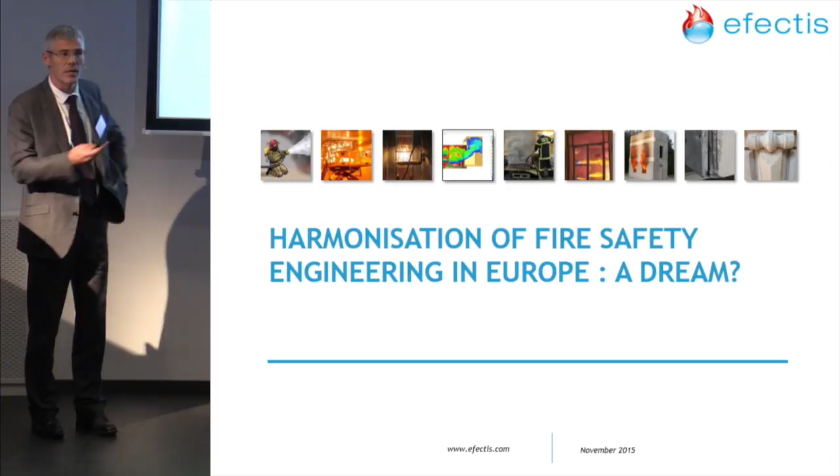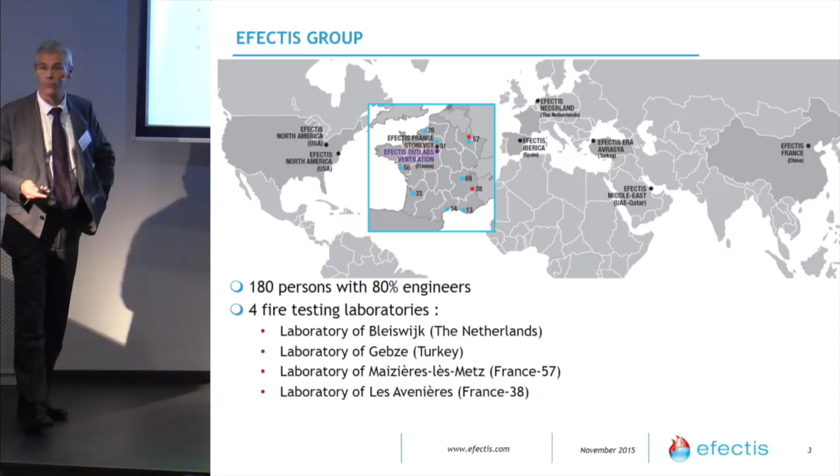So just a few words to introduce myself and Efectis. I'm leading the group Efectis, where there are 4 labs - 2 in France, 1 in Turkey, and 1 in the Netherlands. So you imagine that effectively standardization, testing, everything is fully linked. And I will speak about that, on how to link all these things.

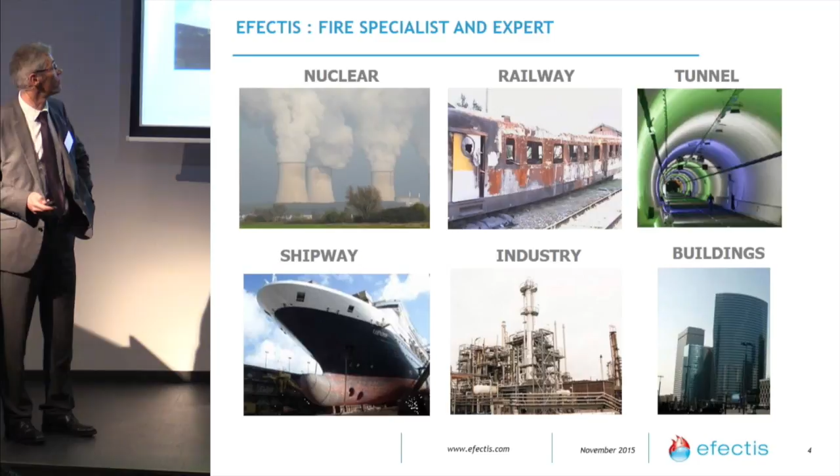We are involved for all types of explanation of constructions - meaning transportation, industry, nuclear plants, energy sector in general. So we can use all the research knowledge from all these aspects, because fire safety is really completely transversal and applied to all types of construction, industry, or transportation.

Mainly, as it was for many years, regulations were mainly based on prescriptive rules, and they were based mainly on the knowledge we had on fire dynamics occurring more than 20 years ago, 30, 40 years ago, or sometimes, as presented just before, more than that - 100 years ago.

20 years ago, it was relatively easy to change regulations. Now it's more and more difficult to adapt the regulation to the risk of the building. And it was shown this morning from a US point of view about the evolution of fire dynamics in buildings.

So the increased capability of the fire kinetics will need changes to adapt the regulation, but it's more and more difficult for all the ministries in charge of the prescriptive rules to adapt it regularly, and mainly according to the different investigations we can have. So these prescriptive rules are...

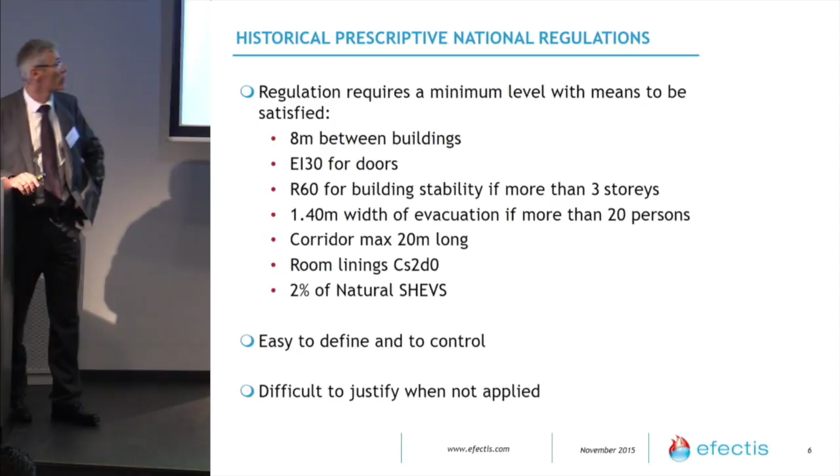So in fact, Europe has been included in fire safety since the directive of the construction product, introduced at the end of the 80s, with new essential requirements that were defined, and then all the laboratories worked together in order to have a harmonization of the tests at the European level.

Then we were able to define product performance in standardization conditions, leading, I would say, more recently, because the first products required for CE marking were in 2003 - it was mainly for fans, for fire reasons, for example. So it's a very recent situation, as the last products to be dedicated to CE marking will be doors - we don't know if in a few months or perhaps a few years.

But nevertheless, this whole European standardization that has been made has been enforced by the CPR, so in 2013, the Construction Product Regulations. So this was the first step of harmonization in Europe, but we will not, of course, stop at this stage as CPR. And the question is how to harmonize the safety levels in Europe.

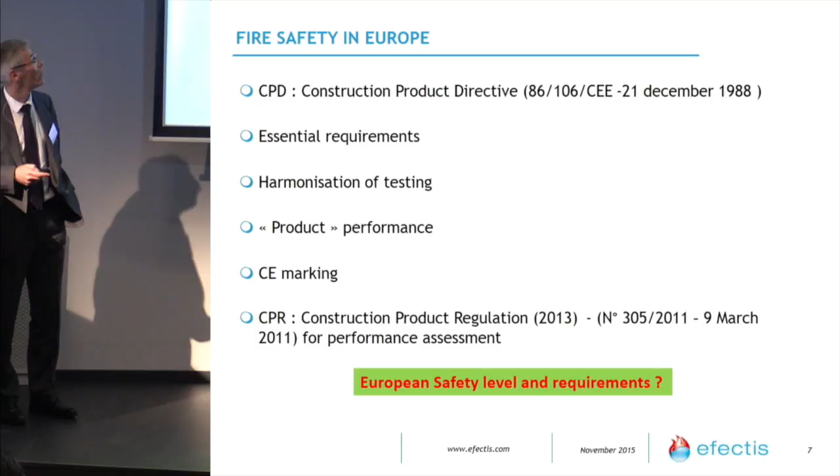So there was mainly one way to harmonize the safety level in Europe: to use fire safety engineering in order to satisfy the main essential requirements that are given by the CPR in Europe.

So the main question is that the notion of safety level is very complex to define, and deriving a safety level from the prescriptive regulation is today impossible. So making such comparisons between prescriptive codes is very difficult, and I would say impossible, because they are often based on different strategies about fire safety.

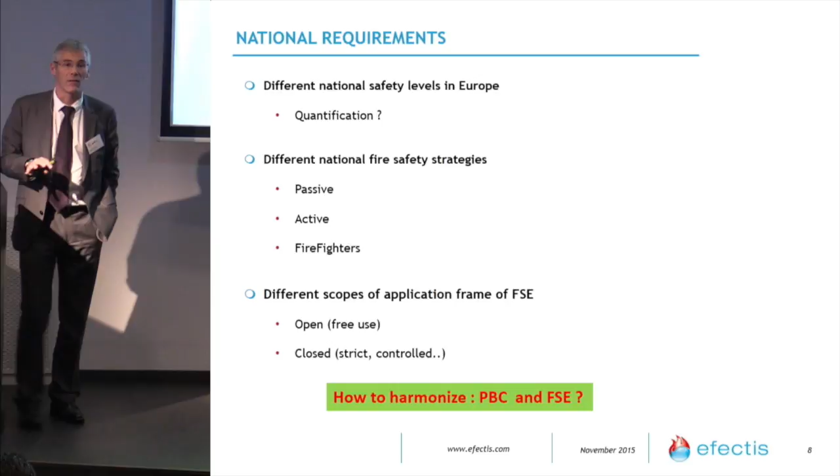Some are more on passive, some are more on active. Mobile firefighting conditions are also more included in some strategies. And all these prescriptive codes are using combinations of these three strategies for defining their own safety levels.

So the main way to harmonize the safety level in Europe is to use fire safety engineering. But today, in the same way, fire safety engineering from a national point of view is open differently. For some countries, it's more free use, and for other countries, it could be controlled or often fully refused to be applied on different constructions. So, how to harmonize the FSE and how to define a new performance-based code from a European point of view, at European level.

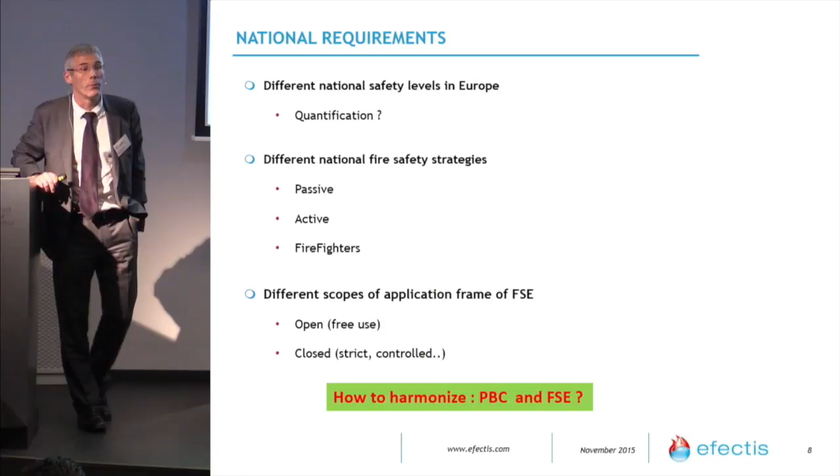But before going to harmonization, just some information and considerations about fire safety engineering. First, if we take the ISO definition from TC 92 SC4, that is the fire safety engineering standardization from an international point of view, and the last meeting was 2 weeks ago at NIST in Washington.

The main consideration is that FSE is the use of tools with scientific appreciation. Scientific means that you need to use the state of the art, the knowledge that we have today, not what has been standardized 20 years ago. And mainly fire safety engineering is to evaluate analytically. It means that you need to quantify, and it's not only expert judgment. We absolutely need to quantify.

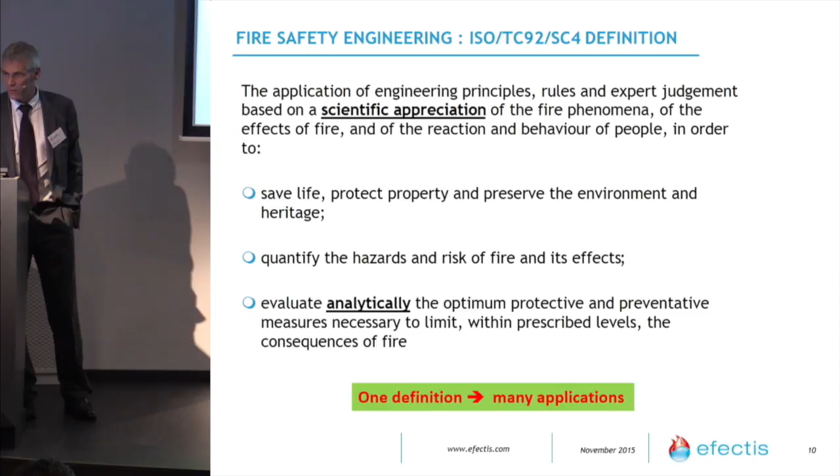Sometimes quantification is modeling, but sometimes, when you don't know, we need to combine that with possible tests in order to have such information that we can get from experimental assessment.

But if we go into the scope of application of fire safety engineering, for everybody it seems clear what fire safety engineering is, but in fact it's often not, because we have different views about what fire safety engineering is. If we just check the aim of the use, we have different types of use. For some, fire safety engineering is clearly design, because there is the word engineering in fire safety engineering. So it's fully related to design.

But for others, fire safety engineering is mainly verification of performance and behavior of the product, of the system, of the construction globally from the design. So it's two different ways to see fire safety engineering.

And then the main problem with using fire safety engineering in many countries is how to control it. What are the different steps of validation? What is the third party for fire safety engineering verification? What is the qualification of the engineers? What is the qualification of the different tools that are used today?

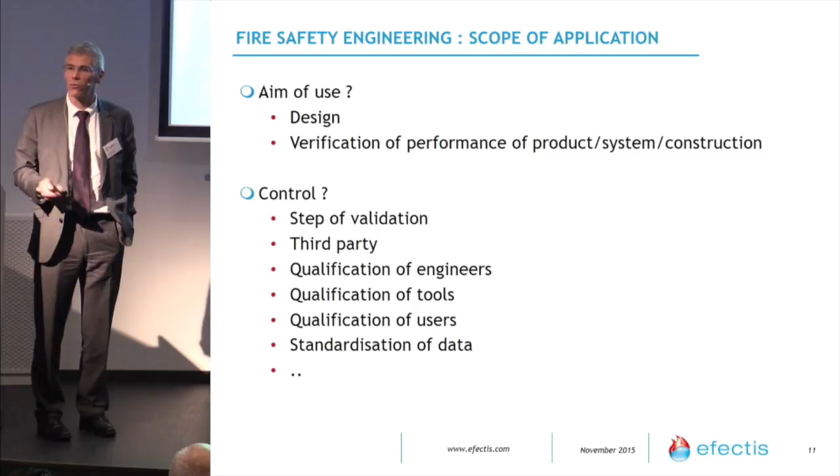The tools are sometimes very easy to validate. The main problem is how to validate the users that are using these tools, and how to standardize the different data. We have seen that for structural engineering, much standardization has been performed in the last years, but is it always adapted to current constructions? So there are many questions that can be asked before going to a harmonization in Europe for the use of fire safety engineering.

And when we look at the ISO standard 23932 for general principles in fire safety engineering, you have different steps to use fire safety engineering, but I'm just highlighting three of them. The first one is the design scenarios. Design scenarios, if your main application is deterministic, define the fire protection and the whole fire design of the building. So if we make any mistake in the fire scenarios, the results will be fully bad, and you will never reach the safety level of your construction.

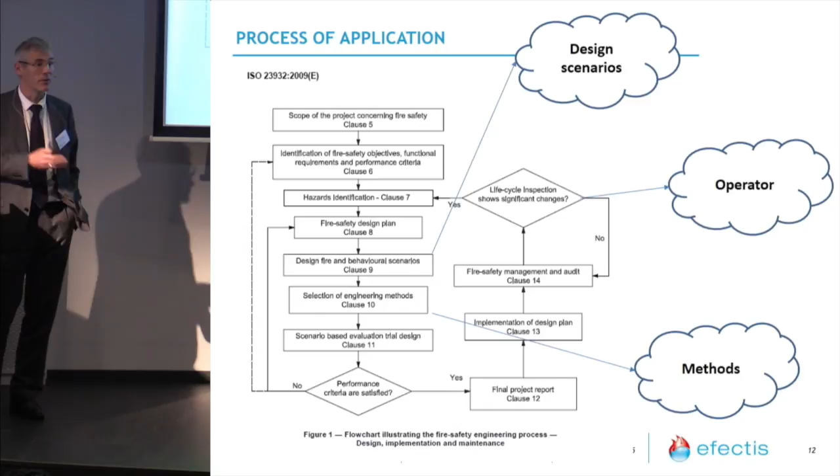And then you have all the methods, but mainly the first part, the scenarios, is more important. And then you have the operation of the building, the life of the building. Are the design scenarios, the design of the properties of the materials, always good compared to the life of the building, the evolution of the use of the building? That is always dealt with by the regulation in part, but with fire safety engineering it is more complex to use it in order to follow the evolution of the building itself.

Fire safety engineering is a huge tool where you need a lot of information. First of all, fire safety engineering is relevant to many different skills that have to work together and interact together. I'm just making a small list, but of course you have more than this. There is the ignition of the fire, so more the chemical part of the fire, but also statistics, but also how to take into account arson or not. We'd say that it is sometimes important to use it.

How will the fire propagate? How will the smoke propagate within the building? What is the behavior of the fire compartmentation under standardized conditions with the ISO rating? Is it enough or not enough compared to the real fire you can have within your building? The structural behavior, all the egress conditions, the fixed extinguishing systems, but also all the actions of the firefighters, their conditions of firefighting, and all the strategy may be included in it.

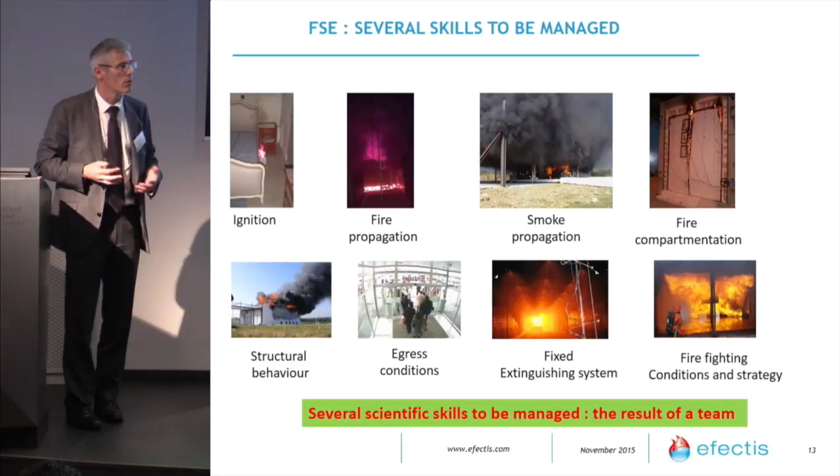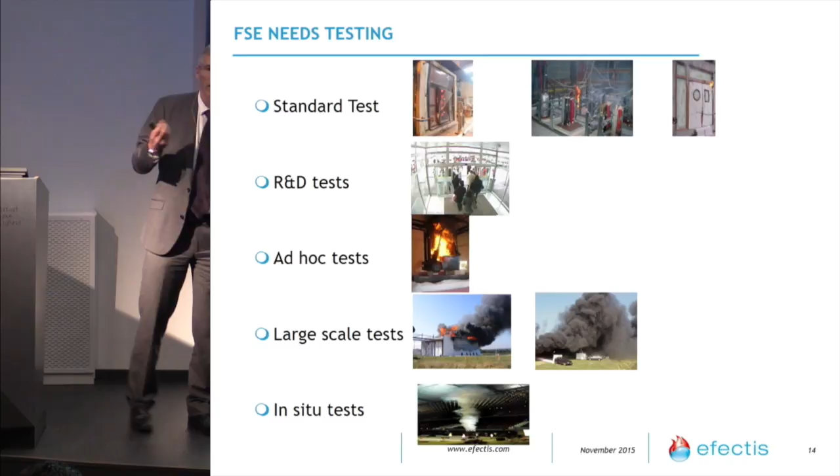So you have all these skills that have to be taken into account when you want to do fire safety engineering. That's why fire safety engineering must remain the result of a team with global knowledge about the behavior of a construction in case of fire. But FSE is often considered as modeling. But we know that we don't know everything. We don't know all the behavior of products, all the behavior of systems. And we know also that fire is very often difficult to model. So FSE needs tests. It's not the opposite of tests. FSE absolutely needs fire tests, fire behavior of products, of systems, or globally of the constructions.

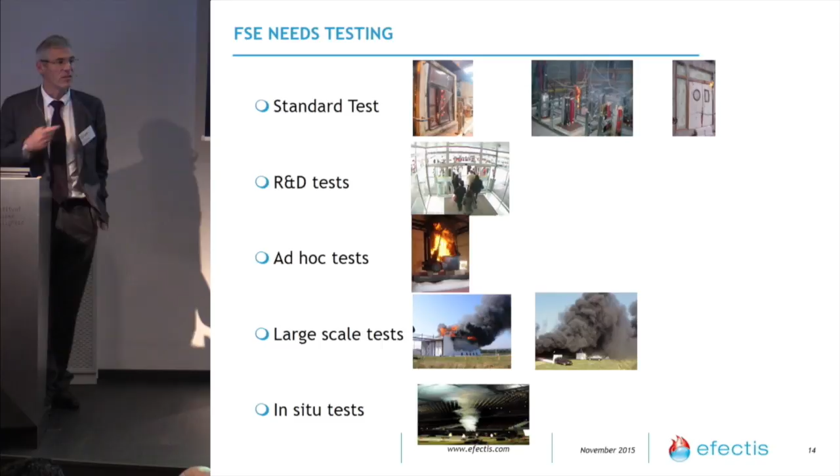They need the standard tests, of course, because there is a lot of information within the standard tests. There are R&D tests because we know we need to go further and more into detail on the behavior of the different products or any other item within the fire safety of buildings. We need ad hoc tests, mainly for the source of the fire, in order to quantify it. We need large-scale tests because trying just to extend the result of a small test is often very difficult. So we absolutely need large-scale tests in order to validate extrapolation effectively, but also to validate the models that are used. And we also need in-situ tests in order to verify within the building that all the systems installed have the right behavior with regard to the design that was fixed before.

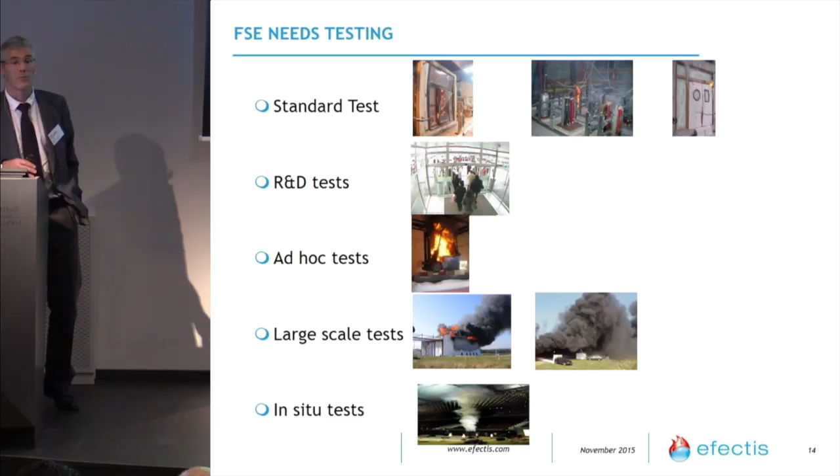FSE also needs to include firefighting conditions, the performance assessment of the intervention. We have different means. The means are evolving, but we need to be sure that the behavior of the means is relevant to the scenario, the constructions, or all the fire load you have within the building. The example of the quick flashover reached this morning, from a presentation from the US, shows that we also need to adapt our intervention means in order to have the right performance with the right scenarios.

But also all the behavior of the products inside the building needs to take into account all the impact we can have, if we need to take into account fire propagation for a big industrial hall, where the economic point of view has to be taken into account, and the environmental objectives also. So to reduce fire propagation, we need interaction between the firefighters' applications and also the fire resistance and fire compartmentation. All these aspects have to be taken into account within fire safety engineering because they are included in the fire safety level of the building. So if we want to make comparisons between the safety levels of buildings, we need to take that into account.

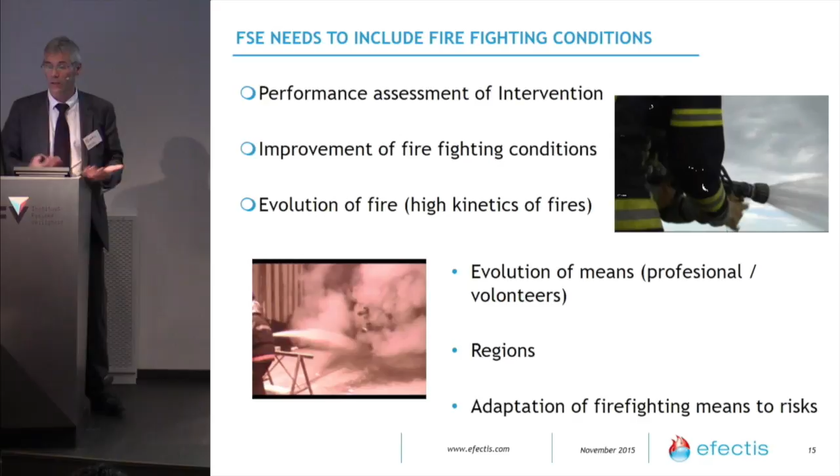We need also to include, from a European point of view, we know that SFPE Europe is working on this aspect of professional recognition in Europe. So we need to take into account the training, the validation of the tools, the training of the users, the years of experience of all the users, the results of a team, because it's always difficult to have recognition of one guy alone, because it is a very complex system. Fire safety is a complex system with many skills, as we said before. So it's very difficult to qualify one guy, and sometimes it's more the result of a team,

so we need to qualify that. Taking into account effectively the independence between the design and the performance assessment, as we consider fire safety engineering may be used on both sides, as a design but also as verification. So we need to take into account also this differentiation in the user. So what type of control do we need to develop for the situation in Europe?

FSE, if we consider that FSE is the state of the art, FSE absolutely needs research. It needs to go on, to learn more about the fire, to learn more about the fire behavior of systems. So additional research is always very important for the future in order to have better tools, in order to have better relationships between the different components of a product or of a construction.

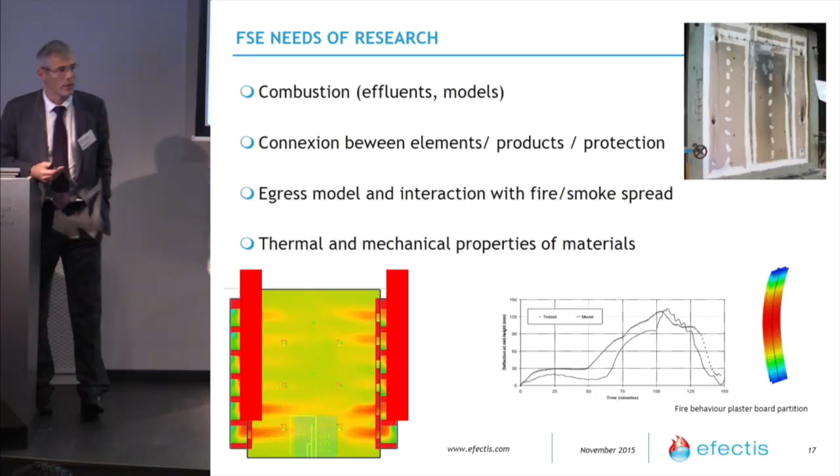Fire safety engineering also needs fire investigations, first to understand the limits. All this information, even if sometimes it is a disaster, we need to learn from this disaster and make fire investigations to understand effectively the limits of our models, the limits of our fire scenarios, because often the fire scenarios are only based on the past, very little on the future.

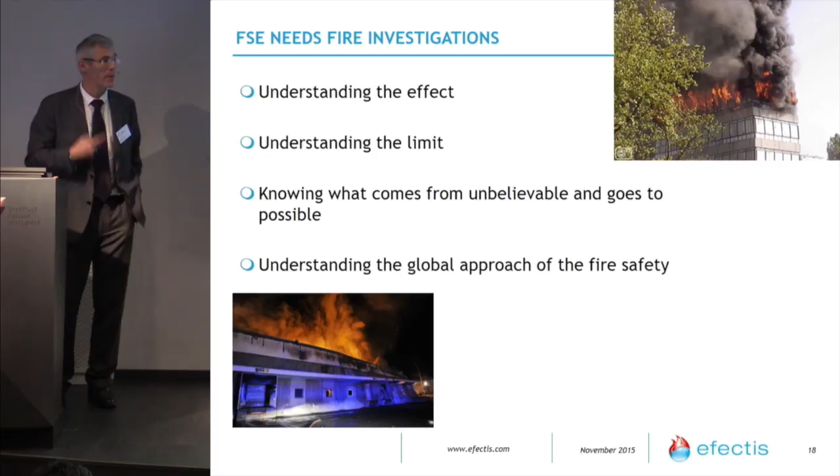So we need to take into account all this fire investigation on real fires, and to understand what went from unbelievable scenarios to possible scenarios. This remains very important, and all this investigation may bring us information in order to define better fire scenarios for the future.

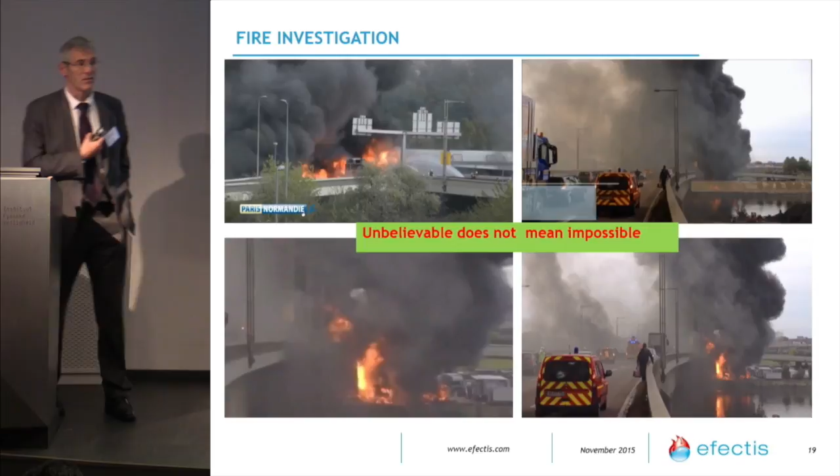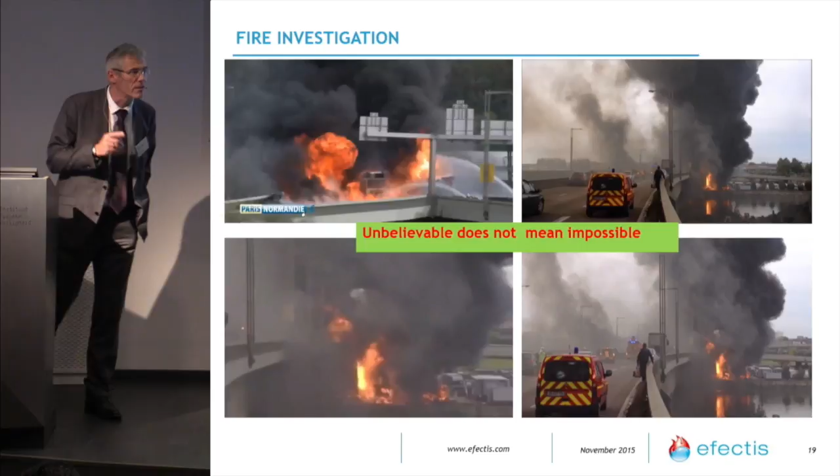And of course, if we are speaking about deterministic scenarios, as I said, there were many scenarios that were completely unbelievable, but now we know that they are possible. Nevertheless, impossible scenarios have to remain impossible scenarios. If we try to design buildings according to impossible scenarios, you will never make any design.

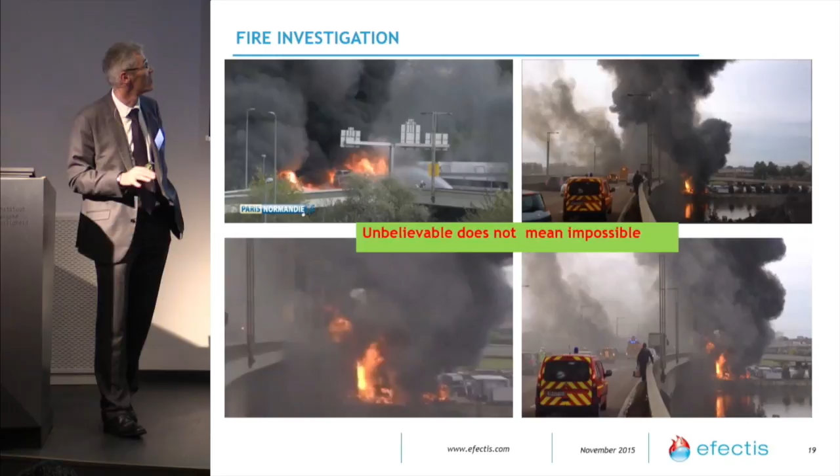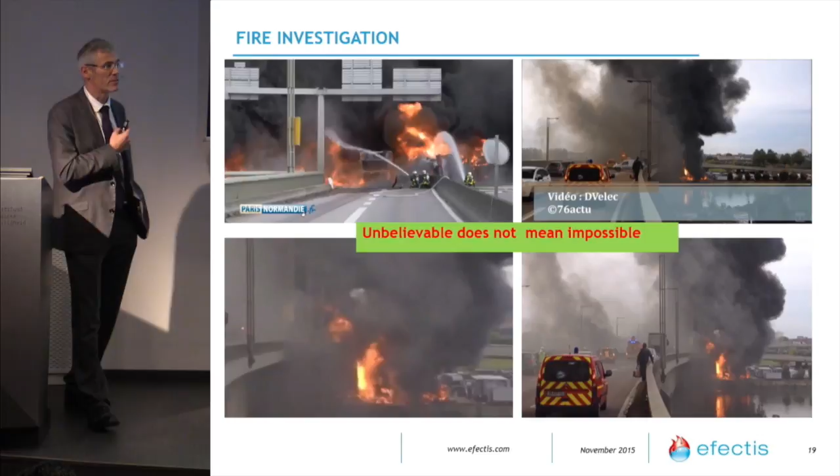But I'm just taking this example of the big tank fire occurring on a bridge at the entrance of the city of Rouen, where there was an accident above the bridge between the tanker and another truck, and then there was leakage of the fuel under the bridge where there were some caravans, so you had additional big fires under the bridge. So considering such a big fire above and under the bridge was a little bit incredible, unbelievable, but really it was true and it happened.

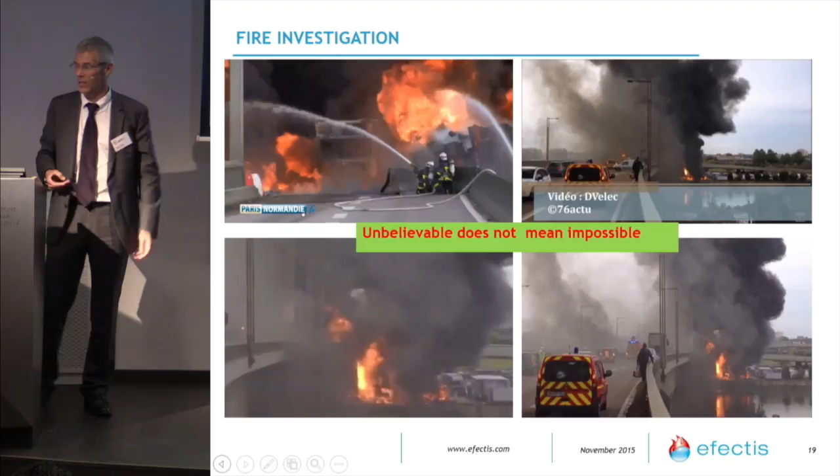And this kind of scenario leads to very big economic loss for the city itself, and not only for one user of a building. It had a complete impact on the economy of the city, of the region. So it means that such scenarios sometimes need to be taken into account, and whether you take it as a design or not, we need to understand that it's possible.

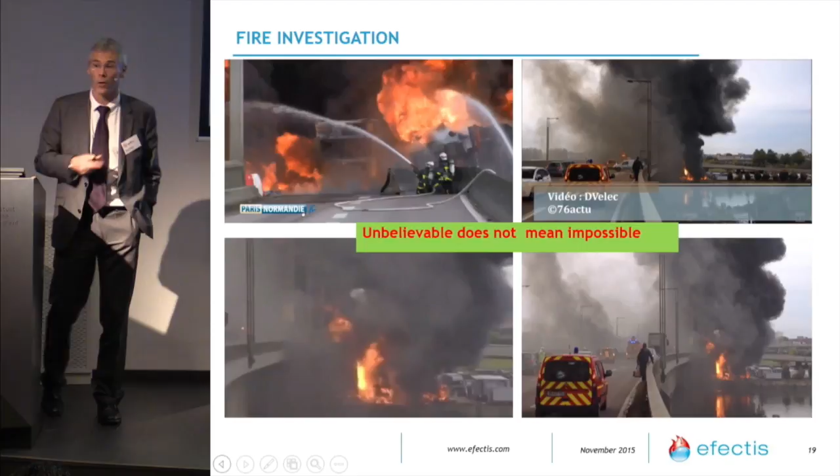Fire safety engineering needs statistics, and we know that there were many works performed 20 years ago. Then during several years, few works were made about statistics, and now we are working again about statistics. There was new work in ISO TC92, the technical report 17755, developed last year, and there are different initiatives in this work. And sometimes we also need to learn a lot about this kind of statistics.

We are also looking at the evolution of the fire load within the cars, and the scenarios that were previously 1 to 7 cars. Now we have some fires with more than 50 cars involved in the car park. So the fire scenarios are also increasing, and you need to take that into account. That is very difficult to take into account within the regulation, so we need to take it into account within fire safety engineering applications.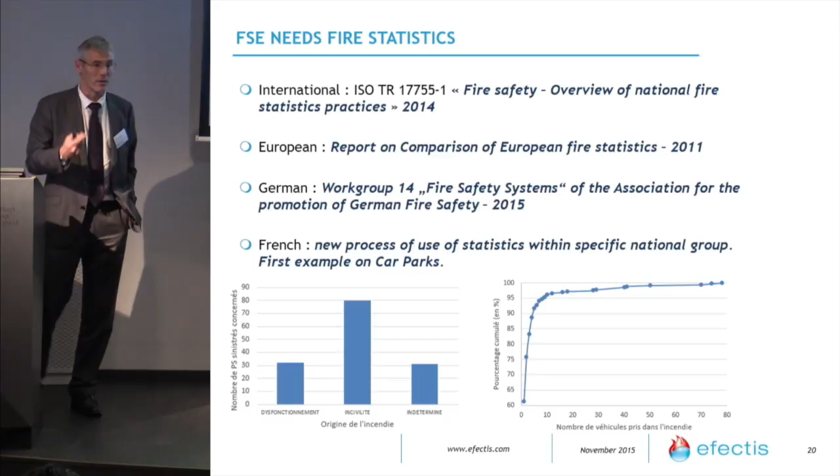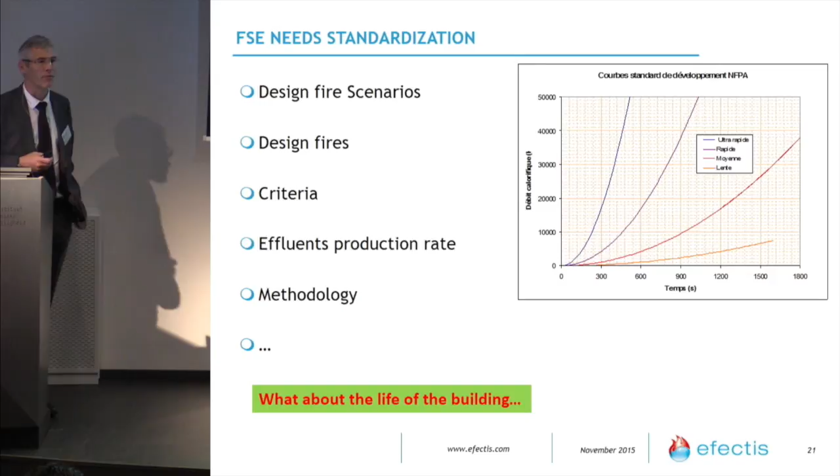Fire safety engineering needs standardization. Of course, there are different types of buildings where we need some help for the designers, even if when we can make the verification of the assessment, we can go a little bit further in order to be sure that we are not at the limits where buildings can reach a kind of disaster level.

So in that respect, it was decided 18 months ago to create, in CEN, European standardization TC 127, working on fire and buildings, a new working group, of which I'm the convener, to deal with fire safety engineering: how to check and how to harmonize fire safety engineering at European level. This working group was previously a task group, so it remained non-official, just discussions, but if we remain at discussion, we never reach any outcome.

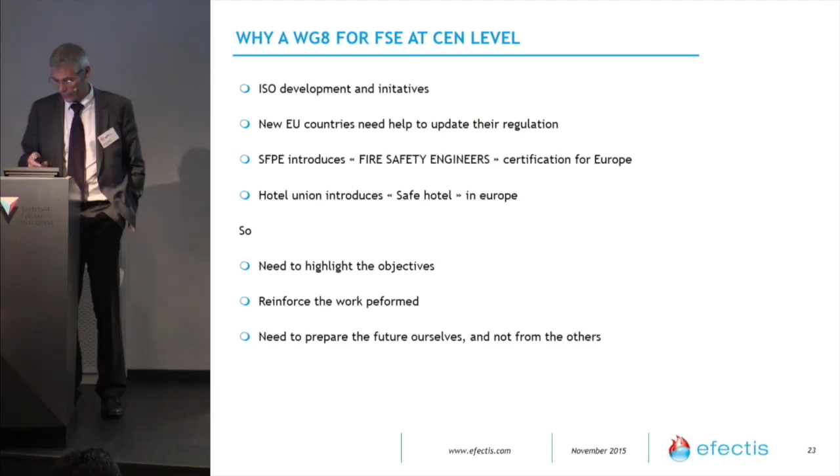So considering that there were lots of development ideas within ISO, and lots of initiatives from an international point of view, knowing that new European countries also need help defining their regulations, knowing that recently SFPE introduced fire safety engineering certification for Europe, and hotel unions introduced safe hotel classifications based sometimes on fire safety engineering applications, we then need to work on this kind of harmonization in order to reinforce all the work that has been performed, to verify that all these objectives are fully defined, and to define our future ourselves for the next design of buildings.

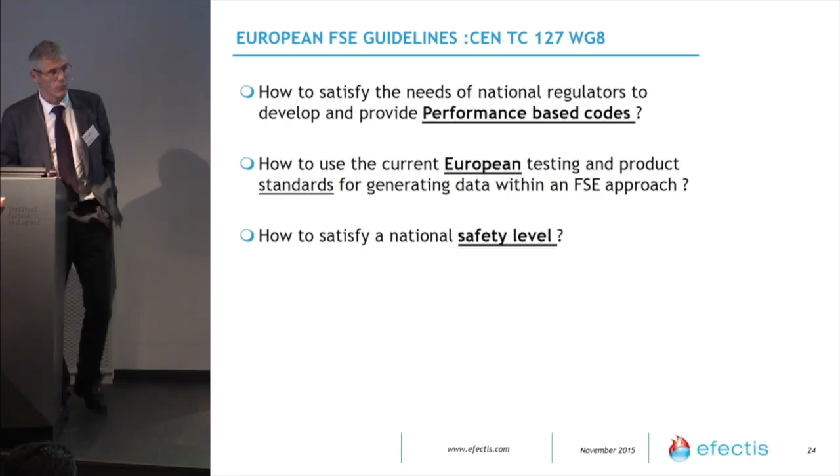So the main questions we have in working group 8 on fire safety engineering applications: the first question is how to satisfy the need of national regulators to develop and provide performance-based codes. Many European countries are far from performance-based codes and are still heavily involved in prescriptive rules. How to use the current European testing and product standards to get new data to understand the behavior of products and systems in real fires. And within an FSE approach, how to satisfy the national safety level and harmonize this safety level from a European point of view.

So we defined different objectives for working group 8 at the European level. The long-term objective is mainly to harmonize the FSE approach, as services circulate freely within Europe, and to assist regulators from EU member states in moving to performance-based codes. As a mid-term objective, we want to produce technical reports assessing the use of FSE in Europe with regard to the different national applications, to make an official link with ISO TC 92 SC4 for fire safety engineering international standards, and adapt these international standards to European applications.

We have seen that from an international point of view it is very difficult to harmonize when each country tries to apply it. The latest application made within ISO, with convener Daniel Nilsson from Sweden, showed that it was very difficult to apply this international standard in each country because there are too many national applications. And in the short term, we want to understand the situation in Europe, so we are updating the work that was done for BENEFEU 15 years ago in order to check the evolution of fire safety engineering application in Europe over these 15 years.

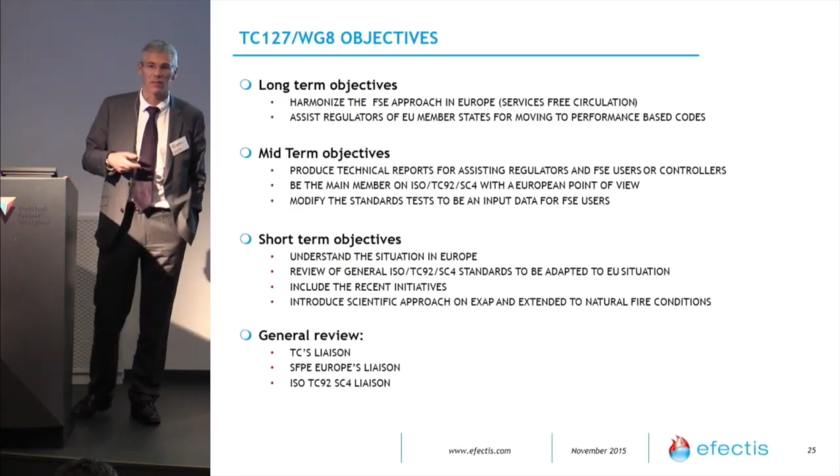Make a review of all the SC4 standardization in order to adapt it to the European Union, to include the recent initiatives within these applications, and work with the other working groups from TC 127, so how to work on the behavior of products as it is today within the natural fire conditions compared to the standardized conditions.

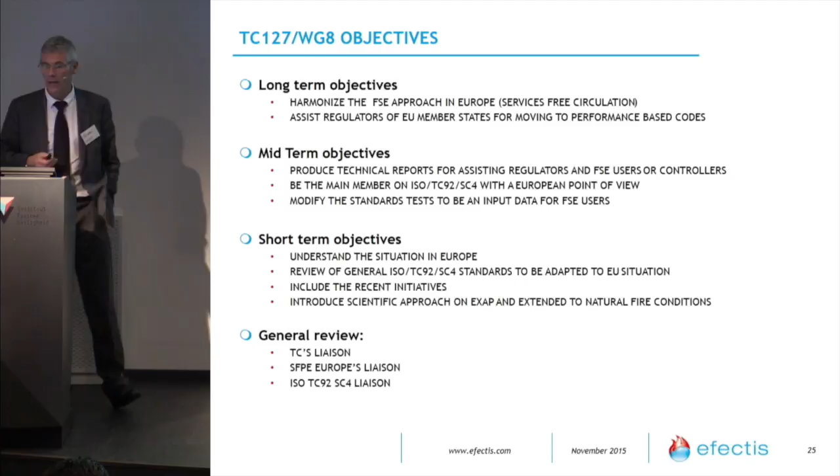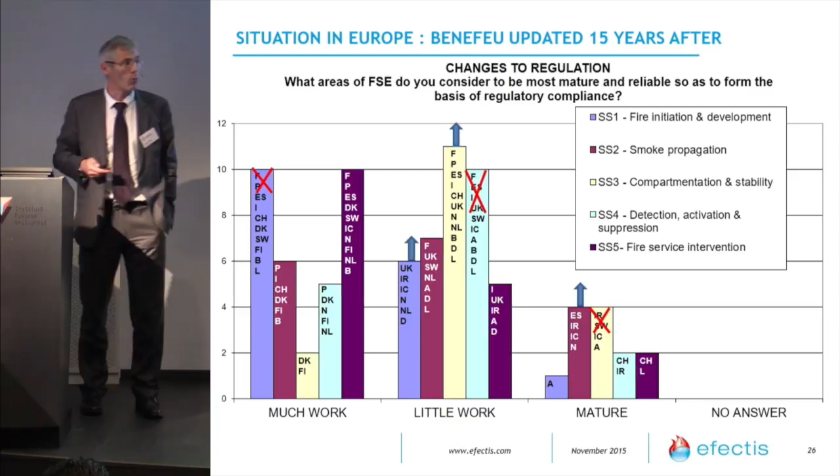We have begun this work on updating the work of Benefeu made 15 years ago, just to check what is the modification. We have only 5 responses today, but some are just arriving. So we have the updating of this survey in France, Sweden, UK, Netherlands, and Spain. And we have observed different modifications of the situation compared to 15 years ago. For example, the main change we have observed is within education and training.

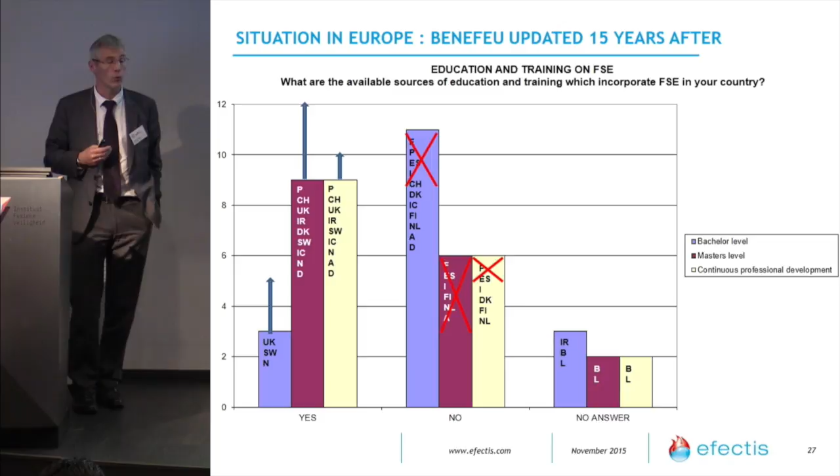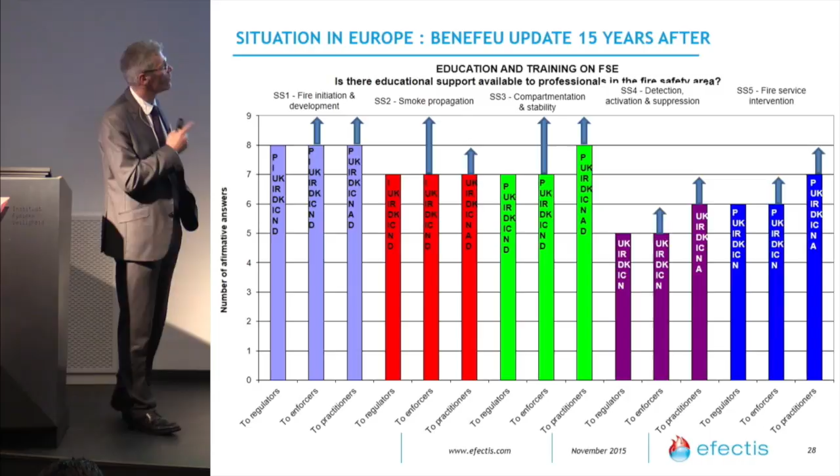It means that before 2000, training and education in FSE was very, very small in many European countries. And now lots are updating their education or developing new education, as we have in France. And if we check who is involved in this fire safety engineering training and education, we can observe that for the enforcers and the practitioners, of course, there were some developments. But regarding the regulators, they are not involved in the evolution of that. And this is really missing, and interesting to include for future development.

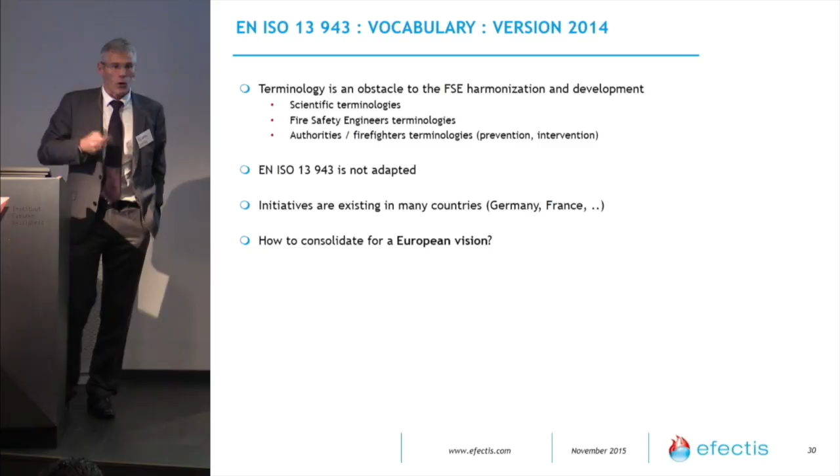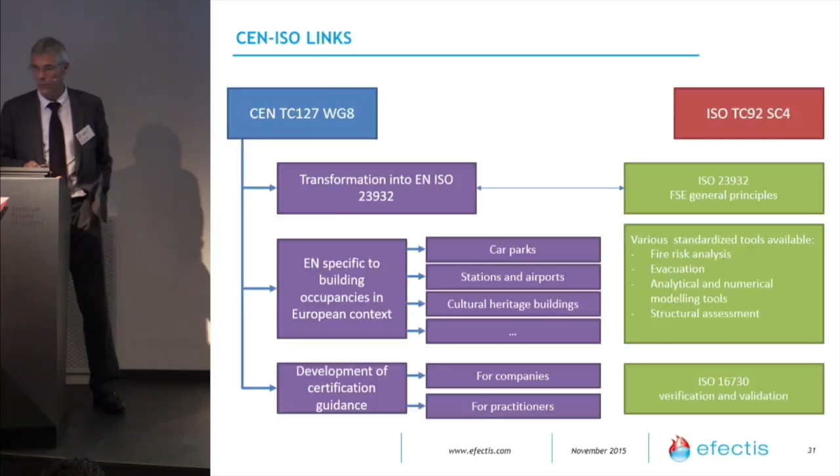So, as recent work, we are trying to work on different ISO standards to make this link between ISO and CEN, in order to take into account the work made from the ISO point of view and not do the work twice, but adapt it to Europe. So, as a global conclusion of all this work, the harmonization in Europe is a real concrete goal. All the member states in Europe are increasing their FSE each year, and the Benefeu update will be a good observer for that.

The member states voted unanimously for an official working group at European level, so all the countries are involved in that topic. All the states have some experience in FSE application, but very, very different experience. That is really interesting. The working group has to include all the European initiatives, research, standardization, investigations. All these aspects have to be included.

They have to take into account the international work, because fire safety is known everywhere. And the main topic will be how to develop this performance-based code from a European point of view, but you can understand that it's a long way to reach that; we have much work to do to reach such objectives. Thank you.

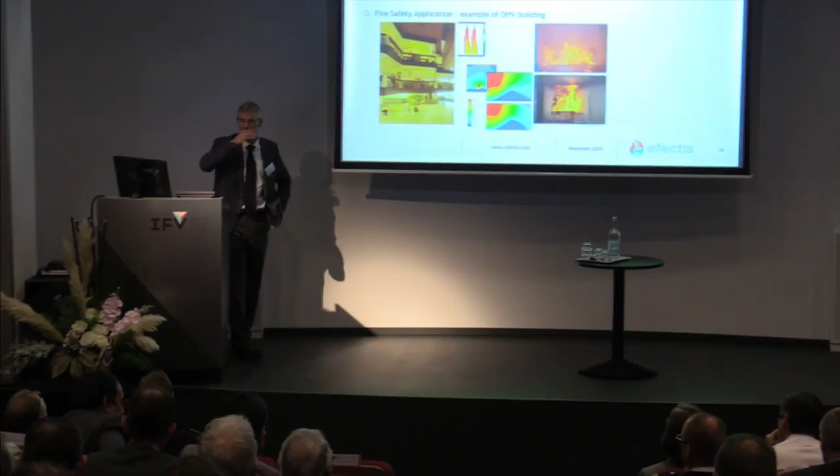Yes, Ricardo. You say that at this moment we have enough knowledge to apply FSE to have reliable results, or at least results in real fire safety? In fact, we will always update our knowledge. So if we are just waiting for new knowledge, we will never apply it. That's why I consider fire safety engineering to be a state-of-the-art application. As for the construction of a building, we need to use the state of the art in order to build. So today we have enough knowledge, effectively, as we can apply what we know.

But we just have to know our limits, what we don't know, how to include as a deterministic approach what we don't know, how to include tests when we are not able to do fire modeling or where we have some doubts about the results. So we have some limits. We need to know our limits in order to apply fire safety engineering.